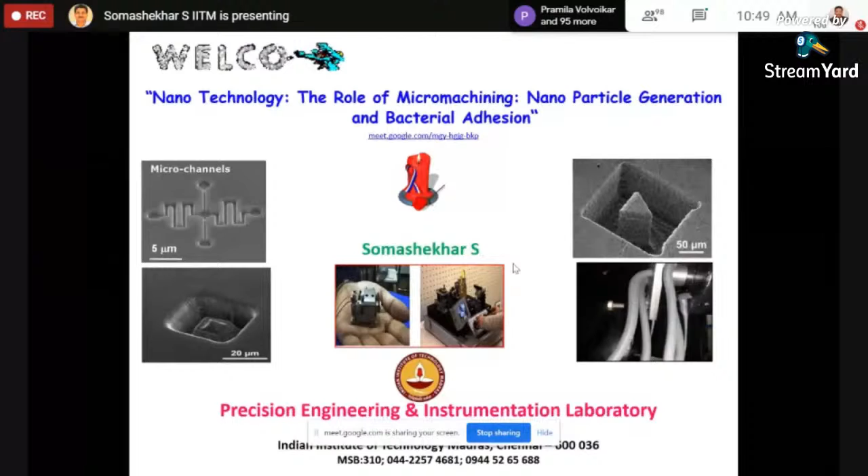On the micromachining laboratory, research work and challenges. Then we'll move on to the role of miniaturization of product and process, why it is very important. Then we'll go to the micromachining techniques, quickly the silicon-based and machine tool-based micromachining technique, because this micromachining is basically developed for MEMS devices from the electronics industries. Now we are using the same technique in the machine tool industry to do the same work beyond the scope of silicon-based micromachining.

MicroEDM - we'll concentrate more on nanoparticle generation and characterization of nanoparticles, basically copper, aluminum and silver nanoparticles. One more thing I will emphasize today is the hybrid process, which I call electrochemical discharge machining, also used to generate various features and nanoparticles of non-conducting engineering material. I will show you all these things quickly.

Then we'll move on to nano finishing for bioimplants and bacterial adhesion study.

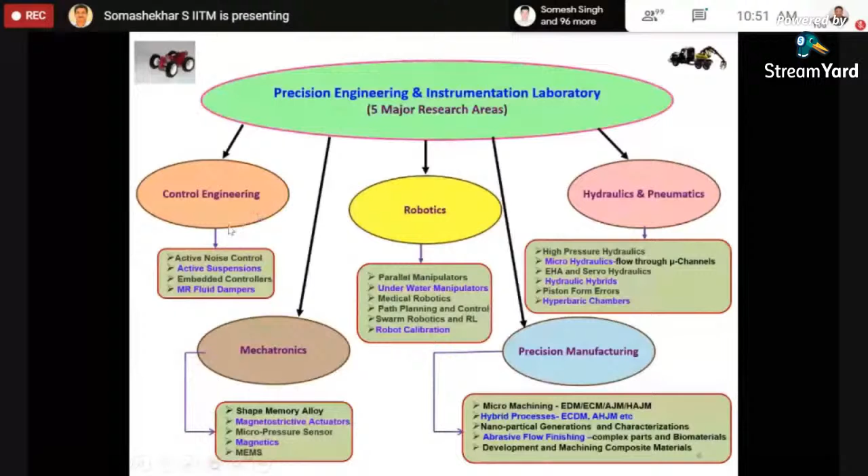This is our laboratory - what you are seeing now is the Precision Engineering Instrumentation Laboratory, one among the many laboratories in the Department of Mechanical Engineering. We are concentrating mainly on five major research areas: control engineering, mechatronics, robotics, precision manufacturing, hydraulics and pneumatics. Whatever list I've given is only a limited representation - in all these areas we are working across many domains.

All our research scholars are using these setups on the tabletop to carry out experimentation. Simultaneously, they acquire the data and do all the analysis on the same table. This is one of the beauties of our laboratory.

One more important facility we have is a robot calibration test facility - that is a FARO laser tracker. What you are seeing is a FARO laser tracker; the cost of this machine is covered under a DST sponsored project. It is used for workspace calibration, and we detect dynamic characteristics and errors in the robotic system using this FARO laser tracker.

The laser tracker emits laser light which traces the retroreflector. What you are seeing here is a retroreflector. There are various sizes of retroreflectors, which will always trace it. You will get the coordinates in the data acquisition system, a dynamical software, which will give you X, Y, Z, theta X, theta Y, theta Z.

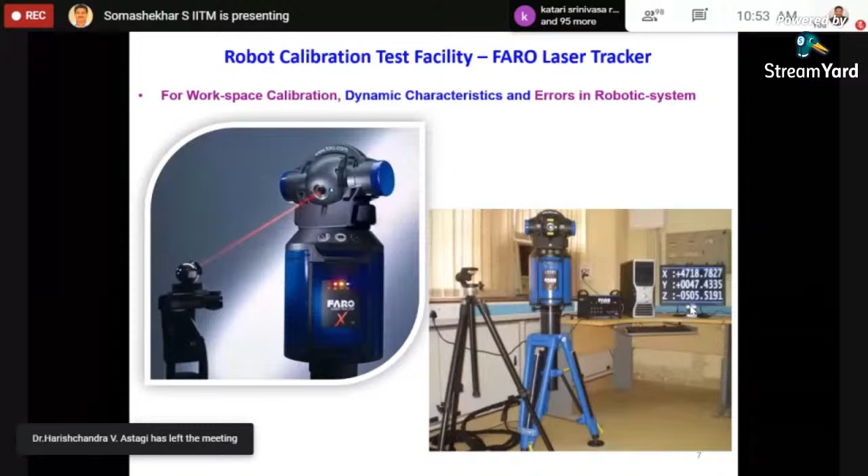What we are seeing here is the EPUC robot, which is programmable and connected through Wi-Fi as well as Bluetooth. This is used to generate particular shapes like a circular trajectory or rectangular trajectory.

What are the problems we face when it traces rectangular type objects? How to overcome this? We are doing so many simulation experiments. You'll see here we are overcoming the cornering using the same EPUC robot by locating the center of gravity of the tracing point.

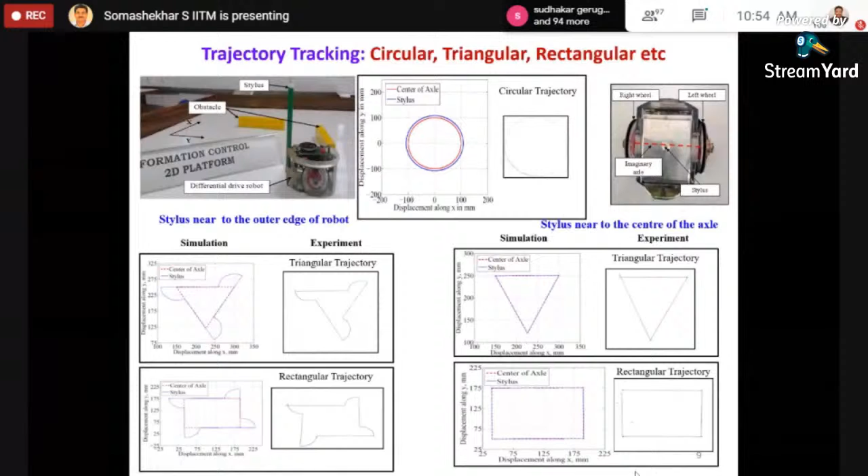Also, we are developing a graphical user interface which connects to many robots. What you are seeing here are obstacle avoidance robots, or cooperative robots for path tracking, connected through Bluetooth, which will trace any path given in the user-defined graphical user interface.

You will get algorithms we are developing for this, for example path planning and trajectory tracking, dynamic obstacle avoidance, reinforcement learning. Many algorithms we are developing in the robotic area along with our scholars. These are some papers where you will get a lot of information on how these multi-robots are used in obstacle avoidance, path planning, and waypoint navigation.

This is what I am showing you here, waypoint navigation. This is a newer area, as waypoints are the guiding control points in which you only define the initial position and final position, and place N number of obstacles.

What it will do is use the probabilistic roadmap, which generates various points, all waypoints, in which our robot will trace the optimal path to reach the destination, avoiding all the obstacles. Again, you will find some papers our research scholars have published in these areas.

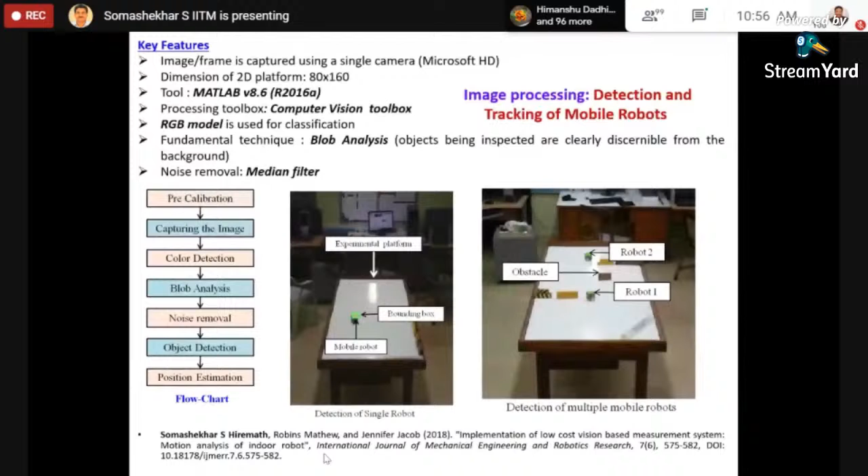Then another area is image processing, which we use for detecting and tracking mobile robots. This was an MTech scholar's work on object detection and avoiding obstacles through image processing. She used some blob analysis. Again, you will get a lot of information in this paper.

Now again, our MTech students are doing very good work. Previously you saw it would only avoid obstacles. Now, as you see in this figure, the simulation work he did will circumnavigate the obstacle, get a clear size and shape of the obstacle encountered, then go to the destination.

The Bug algorithm is a well-established algorithm to circumnavigate obstacles. Now we are using the same principle in multi-robot systems, where two or three robots come near to the obstacle.

As soon as two robots detect the object, one will circumnavigate clockwise and another anti-clockwise. Every time they exchange data on which is the nearest point to the destination, this is transferred to the previous robots, who then follow without needing to circumnavigate again, taking the least path to reach the destination while avoiding obstacles.

This is also a very important breakthrough in the multi-robot system. If you use many robots, the path traveled and energy investment is much less. You will also see an important general simulation of the multi-robot system, whose whole objective is avoiding obstacles and reaching the destination with minimum points.

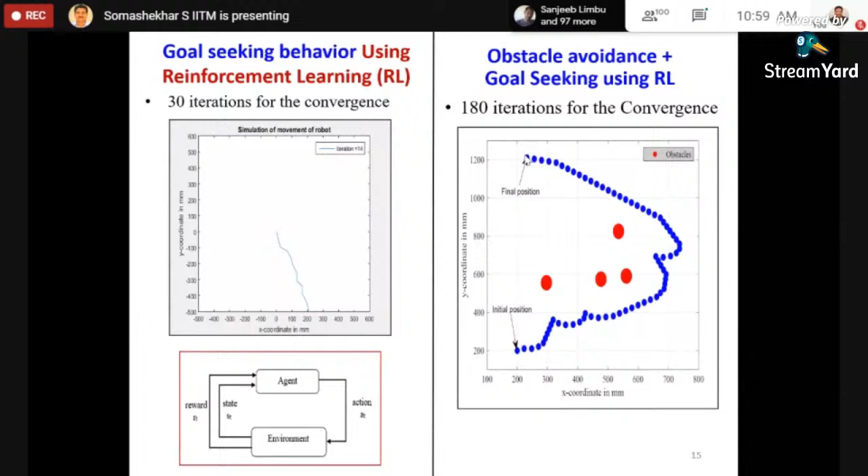This way, the robot does n number of iterations. For example, we defined the initial position, final position, and kept so many obstacles on the 2D platform. It did 180 iterations to reach the final destination. So reinforcement learning, machine learning, and deep learning play a major role in implementing various control strategies in mobile robots.

One more project, last year a student worked on an autonomous lake cleaning robot. Here we are using drones and data collection robots. The methodology includes deep learning for object detection, where the drones carry a camera and detect waste on the river using a local coordinate system, which is then transferred to a global coordinate system.

After detecting the waste, the trash collecting robots move on the lake, collect it, and return to the destination. Here also we are developing control algorithms, but these students worked only on the algorithm parts and simulated it. The experimental part is not completed because of COVID-19.

Now, one more thing we are doing is this reconfigurable autonomous sewage cleaning robot. Sewage cleaning is a big issue because people are manually cleaning the sewers, which is very difficult since it's a dark place and the atmosphere is not conducive. So we developed this sewage cleaning reconfigurable robot, which has many links and joints, and cutters are also there.

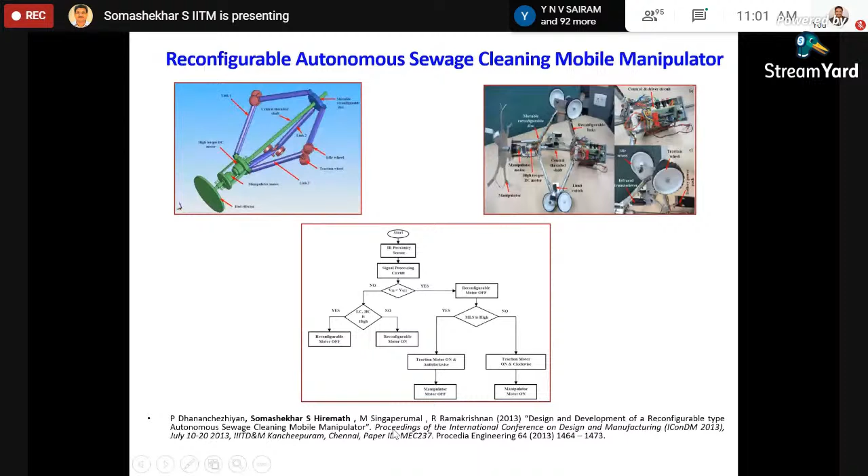Now, why did I tell you all this? Apart from micro machining, I haven't told you anything yet. Today we'll concentrate on micro machining for nanoparticle generation and finishing. The objective of showing this is that we are working in different areas.

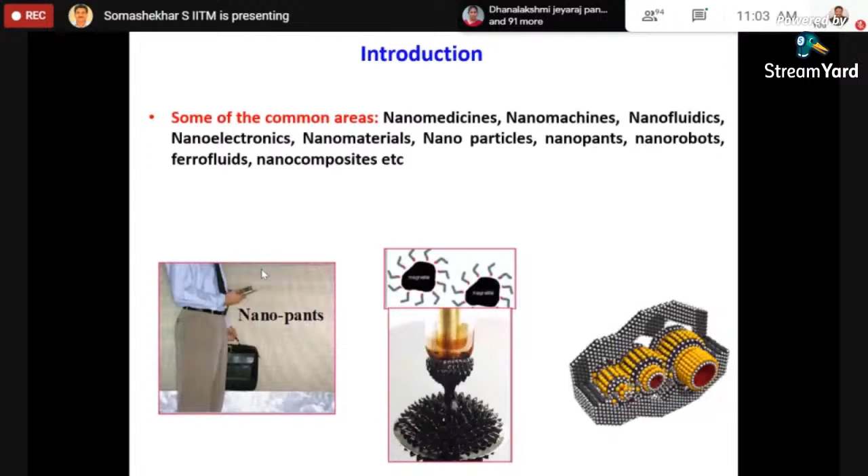Nanotechnology is very wide and difficult to define because its applications are so varied. Some common areas are nanomedicines, nanomachines, nanofluidics, nanoelectronics, nanomaterials, nanoparticles, nanorobots, ferrofluids, and many more. People are also working on nanocomposites by adding nano-sized particles into metal matrix composites or similar materials.

There is a large number of biomedical applications. I will show you in the next slide what applications exist for nanotechnology.

Also remember, funding is huge to carry out basic and applied research in nanotechnology. If you have an idea to generate any nanoparticle, particle separation, or drug delivery system, the funding is very good from the DST to carry out applied as well as basic research.

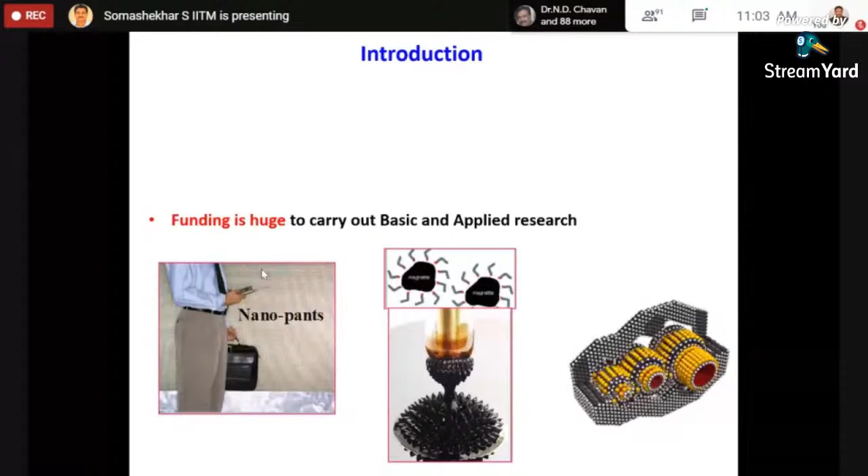Now let's see what nano means and what size it refers to. The term nanotechnology was invented by Professor Norio Taniguchi at the University of Tokyo in 1974. Remember, nanotechnology, mechatronics, MEMS, and other new technologies including robotics were mainly developed beginning in Japan, then widespread use by other countries. The original definition is the production technology to get extra high accuracy and ultra fine dimensions, that is dimensions on the order of 1 nanometer, meaning 10 to the power of -9 meter in length.

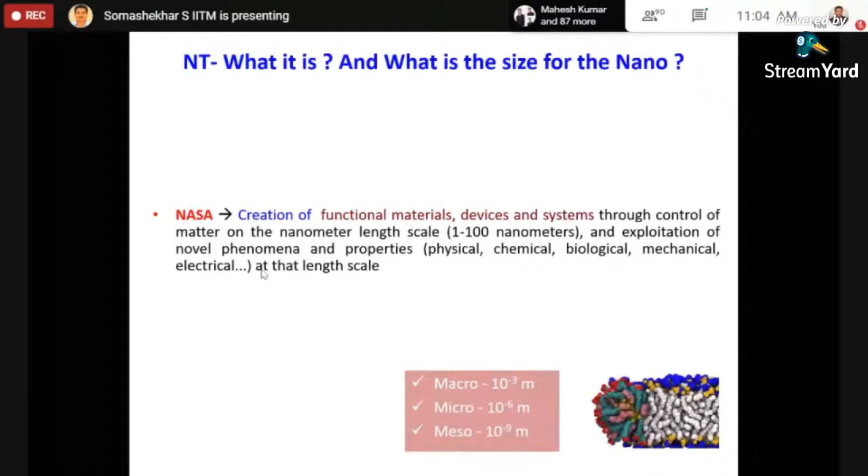NASA also defined nanotechnology in functional parts, like the creation of functional materials, devices or systems, through control of matter on the nanometer length and exploitation of nano-level phenomena and properties of the material, to use for various applications. Because of size reduction and energy saving, many advantages are there in nanomaterials.

Here the particles, as we know, are smaller than 1 billionth of a meter.

Now we'll see, friends, very quickly how nanotechnology was used in the early days. In very old days, around 400 AD, silver and gold nanoparticles were seen in a Lycurgus cup kept in a British museum, showing different colors when illuminated inside and outside.

Also, you'll see, friends, early day paintings were drawn from gold particles, what you are seeing here. Similarly, in 19th century photography, silver nanoparticles were used.

In 1857, Faraday showed how metal particles affect the color of church windows. Basically, small metallic nanoparticles are infused with the glass material. When light radiates inside in different directions, they give different colors. That was a breakthrough.

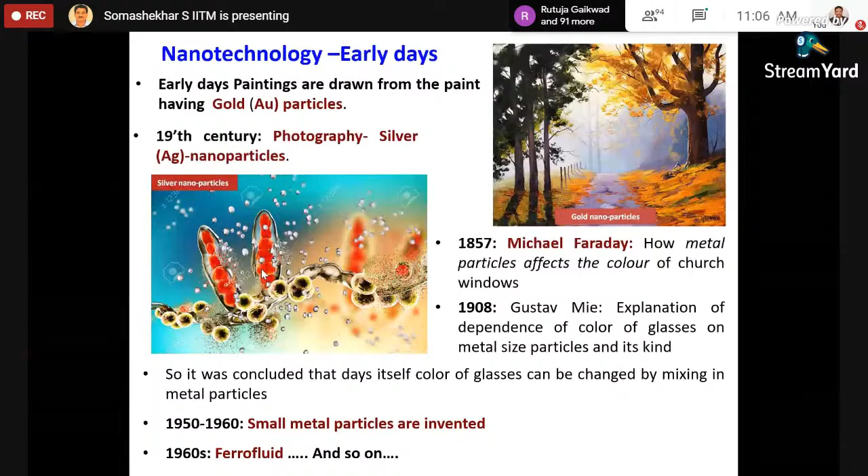From 1950 to 1960, small metallic nanoparticles in the micro and meso scale were invented. From 1960 onwards, there was a huge breakthrough in nanoparticles and ferrofluids.

Now, recently, if you apply a magnetic field or change plus or minus polarity, nanoparticles will reorient in any direction. This is again very important in drug delivery systems, and also in separation of blood pellets when you are separating them.

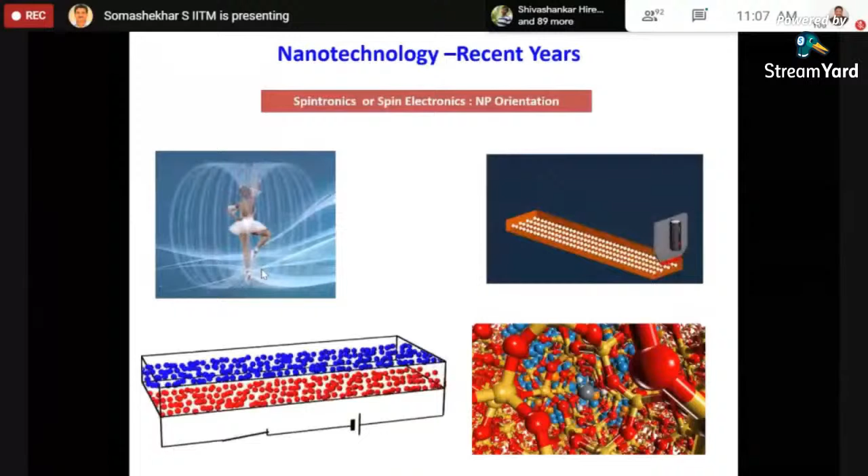So nanoparticles are the cornerstones of nanotechnology currently. Recently, as I have told you, copper, aluminum, and silver nanoparticles have gained significant interest from researchers because they have wide applications. Copper and aluminum nanoparticles are synthesized using various vapor phase reactions and liquid phase reactions.

Now our work is on the mechanical micromachining technique, because nanoparticles are generated through various processes like thermal metal removal process and ball milling method—many methods are there. Now, how the machining process is used to generate nanoparticles by controlling various parameters, we will discuss. The synthesis of nanoparticles using advanced micromachining technique is not explored much currently.

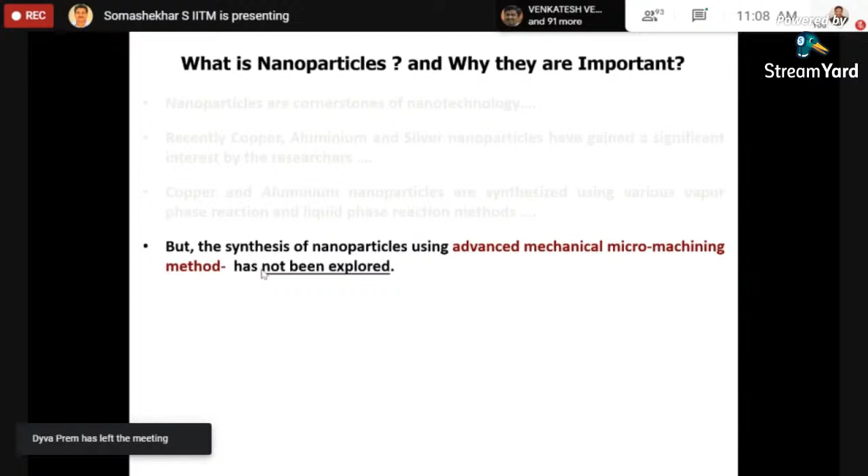The present talk reports on novel approaches to synthesize copper, aluminum, and silver nanoparticles in liquid media. Nanoparticles are synthesized by controlling various operating parameters—if you take any process, friends, not only micromachining. In micromachining, the general parameters are voltage, duty cycle, pulse-on time, and frequency. Like this, for any process, if you control these parameters, it's possible to achieve nano-sized particles.

That is the main motto of the present talk. Whether you use abrasive jet machining or laser machining, if you control the process parameters closely, it's possible to generate nanoparticles of any metals and non-metals.

Also, one more problem we face in nanoparticle generation is agglomeration and sedimentation of the nanoparticles. This is one of the great challenges for researchers—how to overcome this agglomeration and sedimentation for a longer duration. If you keep the nanoparticle solution constant, since the weight is more than the density of water, they will settle down.

To overcome this, what methods are available during the application of these nanoparticles is also a great challenge. During the process too, particles will settle by themselves due to weight. At that time, if you analyze the solutions under transmission electron microscopy or HRSEM, they will show agglomerated particles of bigger size.

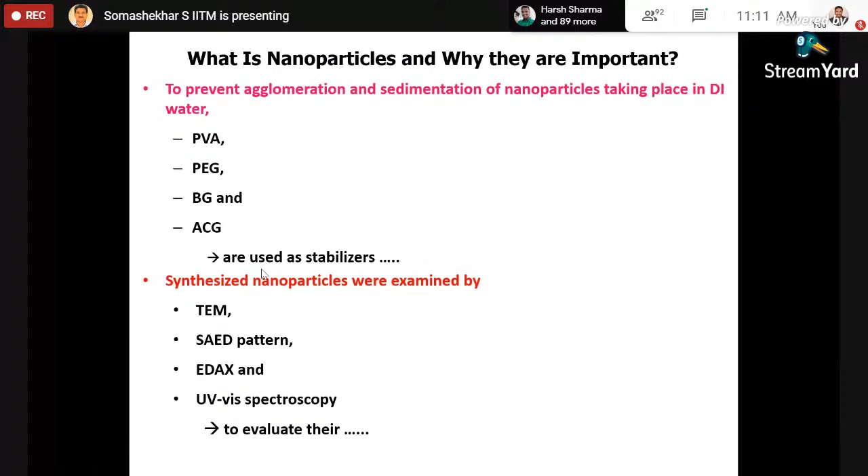Next, some of the particles we have generated in our laboratory, before going to the setup. The mean size of the copper aluminum nanoparticles was found to be 6 to 10 nanometers with a narrow size distribution and stable dispersion in the solution. Here, basically, we are using the user-friendly fluid, DI water.

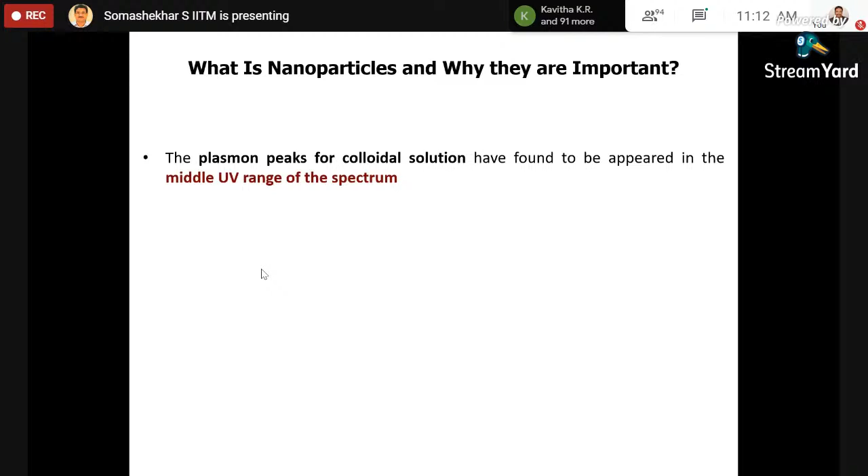The plasmon peaks for the colloidal solutions were found to appear in the middle of the UV range of the spectrum. Thermal conductivity and viscosity analysis were carried out on the generated nanoparticles to suit applications requiring heat dissipation characteristics or to overcome friction between two parts.

The thermal conductivity and viscosity of the synthesized nanoparticles were found to enhance with respect to pure DI water. As I told you, we started the particle generation of copper and aluminum with DI water. Here we use some surfactant to overcome agglomeration, but we compare the results we get, whether it's application or size, shape, whatever it may be, to the base fluid, DI water.

We carried out rigorous experiments on this. When you do the analysis of DI water alone, you get a mean particle size of 800 to 1000. When you add the surfactant, as I told you in the previous slide, it will avoid agglomeration. Also, you use sonication during the process.

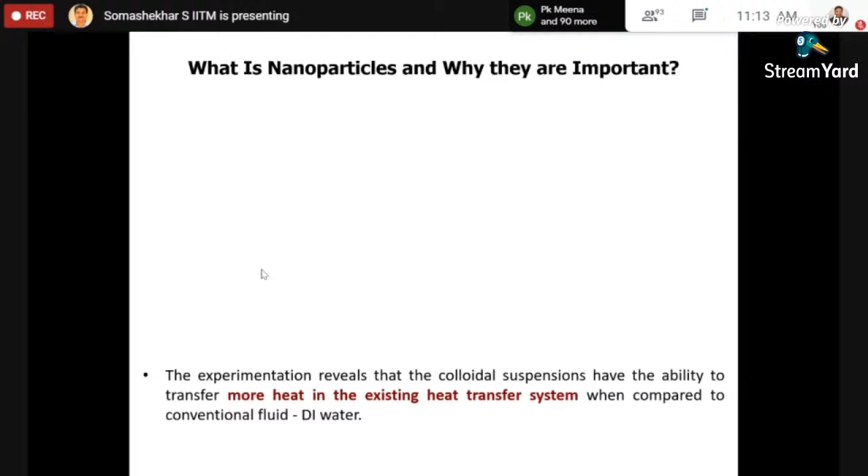The application suitability of synthesized nanoparticles for heat transfer application is studied by developing the setup in our laboratory. The experimentation reveals that the colloidal suspensions have the ability to transfer more heat in the existing heat transfer system when compared to the conventional fluid, DI water.

Then you will see, friends, in nanotechnology, along with the science, there are calls for various application areas. You should not think always of nanoparticles and nanomaterials - nanoprocessing and characterization, and nano products also, people are using this.

Before going to see how nanoparticles are generated using our micro-EDM setup, as I told you, now industries are moving towards smart manufacturing. People are thinking about miniaturization of products because it gives a lot of advantages. Miniaturization is a need of ours because it provides a lot of functional benefits, like miniature products being very simple and occupying less space.

If it occupies less space, then there's low power consumption, more flexibility, and savings in material, and much more. So miniaturization increases overall system efficiency, in one word. But at the same time it poses difficulty in transportation and handling of miniature products. This is a great challenge.

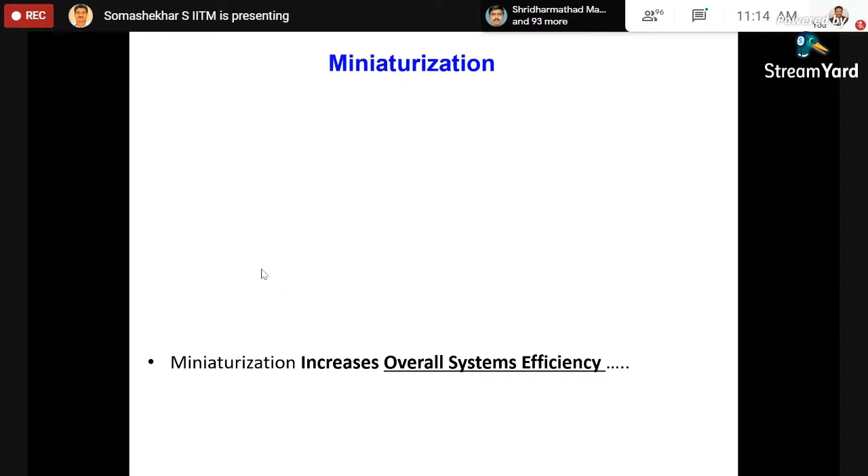Now people are struggling with how to handle and how to transport small miniature products. This is a big area where the scope of research work is still pending.

Then you may ask me, why this sudden development in miniaturization? Because customers' requirements are stringent, friends, more stringent, because they want extraordinary properties - high strength, high hardness, high fatigue strength, whatever nanomaterials or nanoparticles you generate. The customer requirements are very huge. Their demands are very high.

Then they want multifunctional properties - one material should serve all the functions they want. Also, whatever material you develop, as I told you, nanocomposites or nano MMC materials, they must be easily machinable or moldable to the required size and shape. Again, you will see all these properties are contradicting the development of the nanomaterial or nanoparticles.

Miniature features. When you develop a nanostructure, miniature feature generation is the biggest challenge.

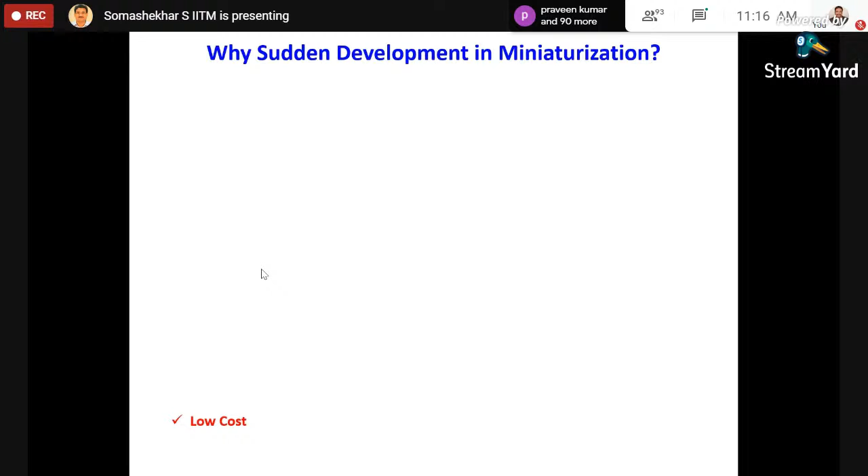After all, nano level finish on complex geometries, because many free-form surfaces are there if you see the aerospace parts. It is embedded with various simple and easy operations like smart products, complex 3D geometries. Then finally the customer wants low cost, you will produce all okay, but later he wants the cost of the product to be very low. Then what to do now? This is a big challenge for us.

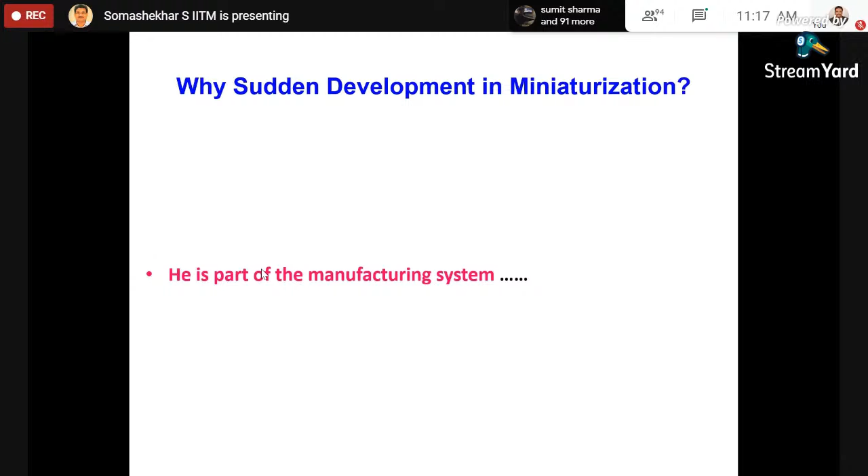Now competition exists worldwide to meet the customer requirements specified earlier. Fabrication of the component with all customer required features is very difficult, correct? Because now the customer is a part of the manufacturing system, meaning he knows every step of how his product is manufactured, what material is used, what process is used. Everything he knows now in smart manufacturing. Previously he would give the order, the manufacturer would develop it and send it to him, and he had to accept it. Now it is no way like that, because the customer will redefine things if he is not satisfied during the process itself, because he is a part of the manufacturing system.

So what to do now, friends? So many things are there. In miniaturization of any product and process, even though it is a need of the time, we have to do many things. As academicians, we have to concentrate more and more on R&D issues.

Currently we have seen tremendous changes in the factory layout. As I have told you, advanced machine tools are available now, even to handle more than 100 tools at a time. What is very important is synchronization of the various devices, because in smart manufacturing everything is connected through the internet. Previously it was inside the factory, now it is connected to the globe through what we call cloud computing.

Search for new strategy development in energy saving, harvesting, and development of newer materials and reduction in waste is also a main theme. Search for diverse strategies and methodology for optimization of process parameters.

Now, to solve this miniaturization of product and process, what we call micro machining or microfabrication or micro manufacturing technologies are there to do some of the things the customer wants now. We have to use these technologies to create the features, or whatever the products are.

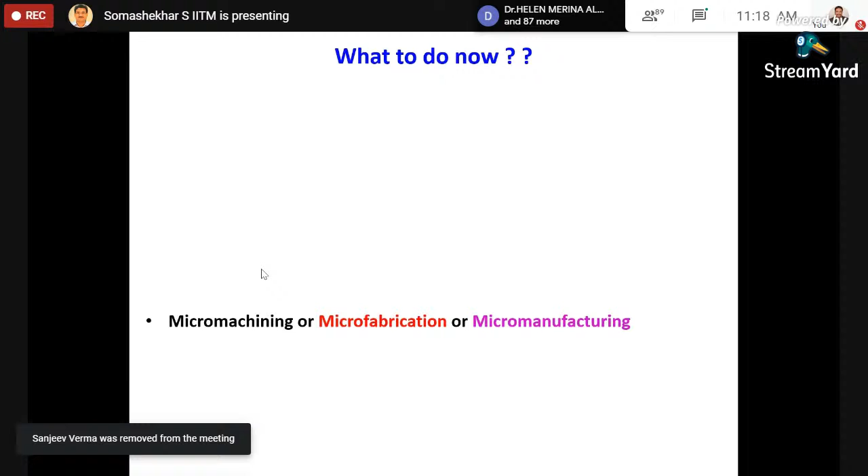Now if you see this micro machining technique, friends, previously it was developed in the microelectronic industries where the chip size is very small, in which you have to implement millions, billions of components integrated into the small silicon chip. You are seeing the processor development also, the size of the chip is very small. When the 4-bit processor was introduced, it had 2,300 transistors. Now you get the same size, but how many components are there, transistors, in terms of billions. Also the clock speed has increased drastically. How is it possible? Only through development in this micro machining technique.

Previously they used silicon as a substrate, that's why it is called silicon based micro machining technique, and also MEMS based micro machining technique, where silicon is a must. When it was introduced, they used bulk micro machining technique, what we call the subtractive process, meaning they remove material layer by layer to get the final product. Now the technology is advanced, now they are removing atom by atom, friends, to get the required products.

If you see surface micro machining, on the other hand, what we call newer technology, even though it is very old, in mechanical micro machining 3D printing is playing a major role. This is the additive process. Any complicated part is able to be generated using the additive manufacturing process, by putting layer by layer. Like surface micro machining, it adds material layer by layer to get the final product, now it is atom by atom they are adding. Why are they doing this? Control over material deposition or material extraction gives close control over size, shape, everything is possible.

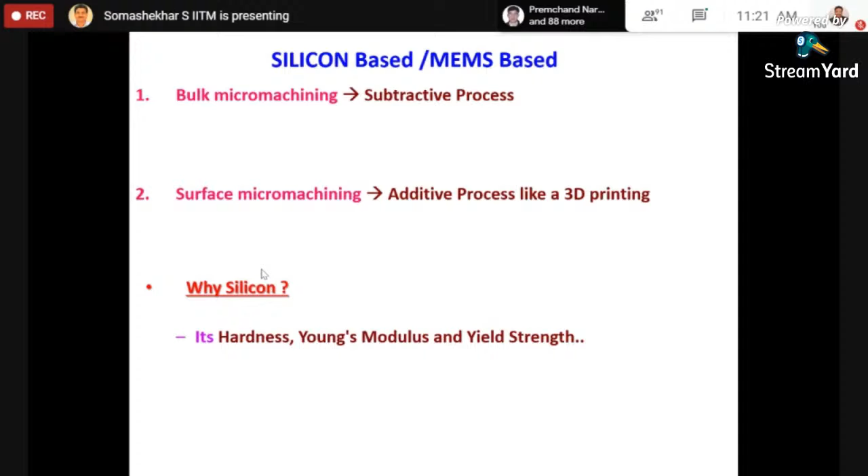You may ask, why silicon, sir? Previously, now people are using so many metals. If you see why silicon, its hardness, Young's modulus and yield strength are higher than steel. Also it is lighter than aluminum and harder than steel. Also, friends, during that time, for miniaturization of product, very small products were very easy to etch or add using silicon. That was the only possibility at that time.

Now the current tendency is that as mechanical engineers, we have to focus on the machine tool based approach. If you see the machine tool based approach, we are also able to currently succeed in producing micro parts using the same technology, like a material removal process, what we call subtractive process or bulk micromachining.

Then there is the second one, the material additive process. Similarly, surface micromachining, where we are adding material layer by layer or atom by atom to get the products. Here, what we are using is the machine tool as a base, keeping different methods, but still using the machine tool as a base.

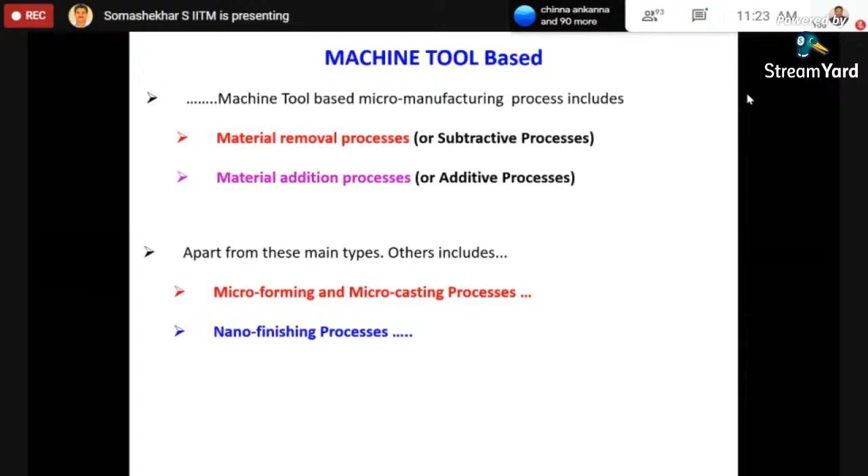Then another category is nano finishing. What is this? This also comes under micromachining. Here the objective is surface finish, to get a mirror finish by removing material layer by layer or atom by atom. How closely you are controlling, the objective is surface finish, not micro features.

But these traditional processes have some drawbacks because physical contact is required, and well-defined cutting edges are required. The most difficult task is the fabrication of these micro tools. Also, when these micro tools come into physical contact, what happens? They break. Chances of breakage are more.

Here material removal is in terms of microns. Please remember, friends, here the objective is not the size and shape of the object. Micromachining is particularly meant for the size of the chip. If the size of the chip is less than 1 mm, it is called micromachining.

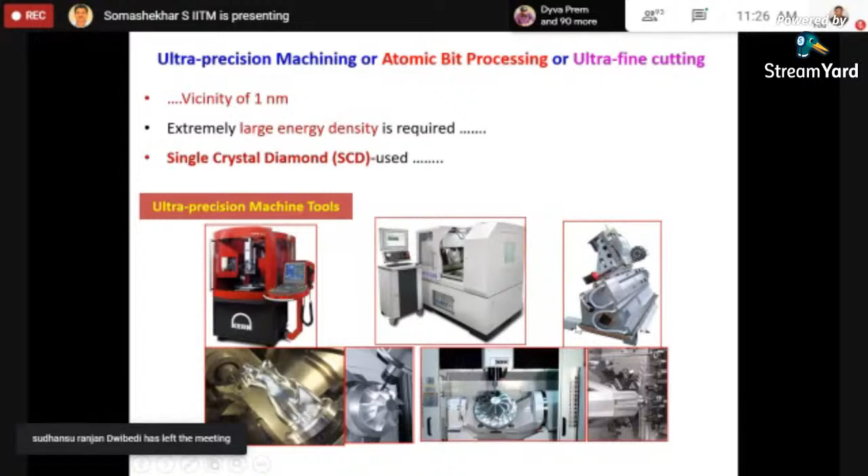Quickly, you'll see here, that's why we call it advanced micro machining technique. What are these advanced micro machining techniques? We are using here some form of energy, whether mechanical energy, chemical energy, or thermal energy, to remove the material.

Again, it is very important that the size of the chip is less than 1 mm. Only then is it possible to generate features of required size to the required dimensions. This means, friends, even though this machining process will take a lot of time compared to conventional machining, close control on precision is ensured.

Then you will see, friends, now people are developing hybrid processes by combining the advantages of two processes and overcoming the disadvantages of the other two processes, resulting in hybrid micro or nano finishing processes like electrochemical discharge micromachining, electro discharge micro grinding. Many such processes club two or three techniques together to take the advantages of multiple processes and remove the limitations available in the other processes.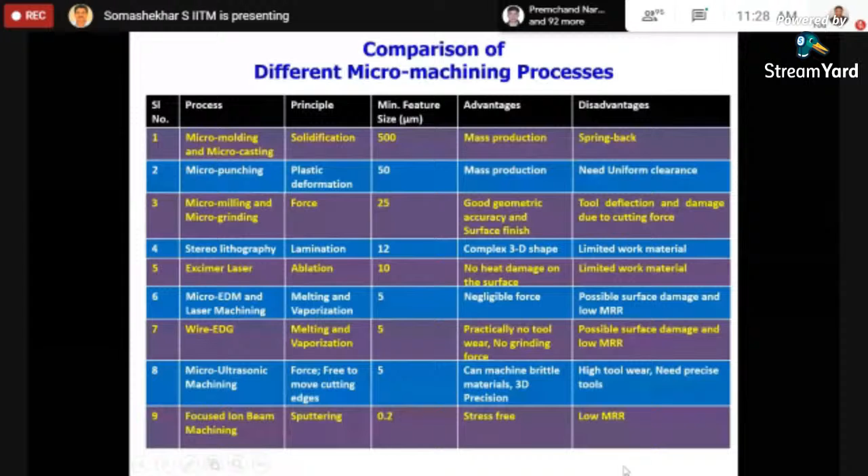Rajesh? Sir, this is Chandrasekhar, sir. Yes, sir, Chandrasekhar. I'm thinking we are connected through Wi-Fi, we are online, correct sir? Correct, we are online, yes sir. Thank you. In between, professor, I'll call you, you tell me yes, okay, only one. After half an hour I will call you. Okay yes sir, we are following sir. Thank you sir, thank you.

Now let us see, friends, some of the micro machining facilities developed in our laboratory. These setups are developed by our research scholars. It's not like lakhs or crores, maximum it would be thousands, apart from the other devices like power supply and oscilloscope, all these things.

Let us see now how to develop the EDM cell. I hope, assuming all are mechanical engineers, we know this EDM cell basically consists of the workpiece, tool, feeding mechanism, and operating parameters. Using this, the basic mechanism of material removal in EDM is the melting and evaporation of the workpiece material. The advantage here is the tool and workpiece are always maintained at a certain gap, what I call gap breakdown.

Now I will show you some of the animations to you people, okay, very quickly.

Chandrasekhar sir, you are seeing this setup? Yes sir, yes sir. Now I will check whether it is okay, you will see now. Sir, you can open, sir. We can able to see, sir. Yes, just now see, sir. Yes sir, thank you. The objective, see, now it is seeing, sir. Professor, seeing? Yes sir, yes sir. Perfect, sir, perfect.

Now you'll see the whole process is controlled. This is a copper plate she is machining now using the PZT actuated tool feed mechanism. Other things are the accessories itself.

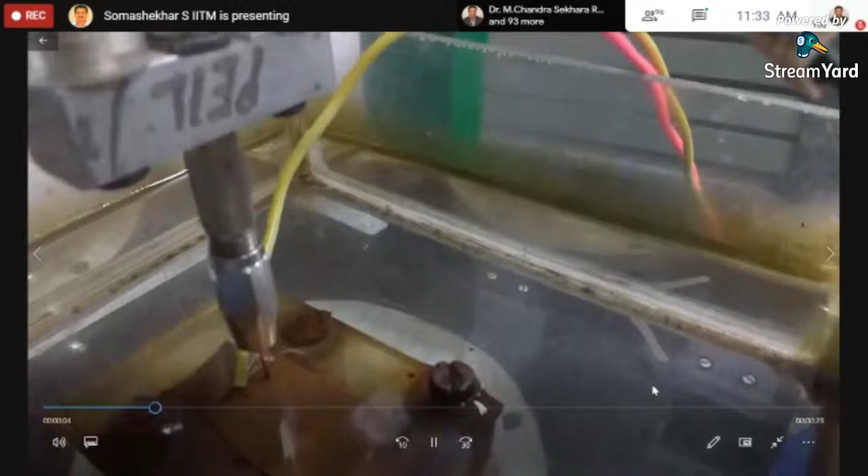Replay, beta, okay, one second. This is, she is increasing the voltage to visualize how the material is removed. The same - you see, friends, here it is the PZT actuating tool feed mechanism.

To enhance the machining operation, we implemented what I call recirculation systems. Let's move on to this very quickly, friends.

Now you see some machined holes. I'm showing you the machined holes on the silver plate. These are some images carried out for different parameters. If I vary the voltage, frequency, and T on, meaning indirectly the duty cycle, what happens to the size, shape, and recast layer? Many things are studied in the process.

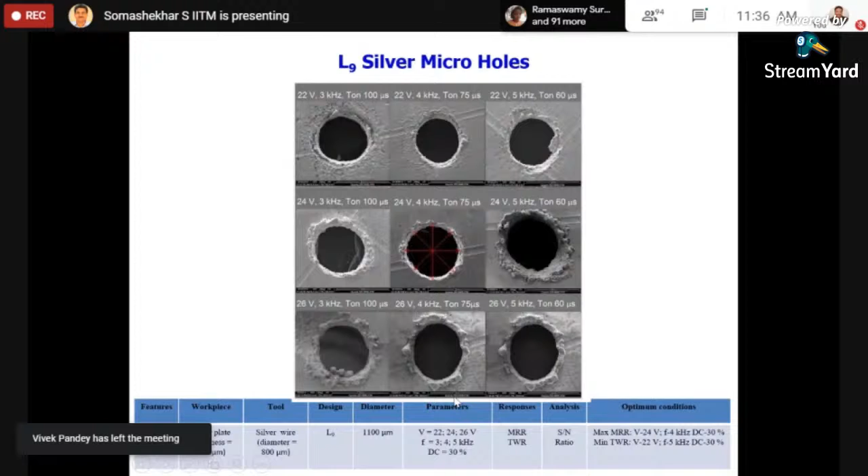Similarly, you will see copper machined holes using the EDM process. To overcome tool wear, the tools are coated with Ni-P coating, nickel phosphorus coated tools, used to machine various holes. She carried out 16 experiments with varying process parameters, concentrating more on tool wear and how it is affected.

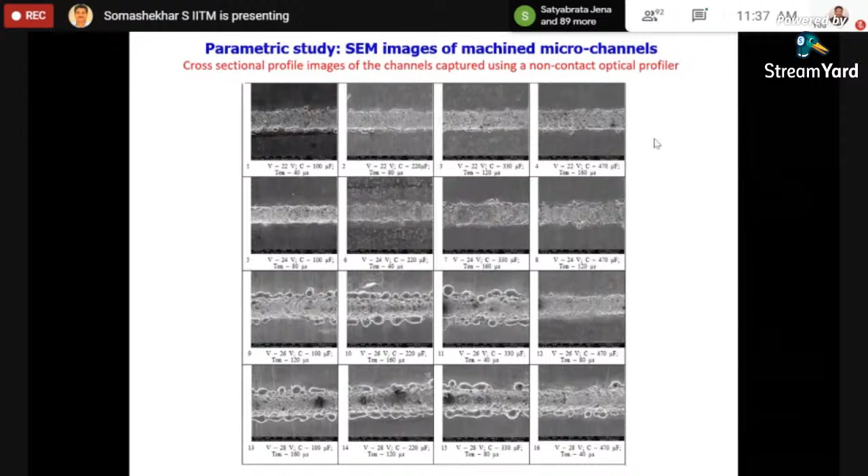Now here, these images show the effect of process parameters on machining channels, straight channels. Depth is also captured using the optical profiler, which is a non-contact mechanism. They measure the width of the channel and the depth of the channel along with the Ra value. These are some of the channels machined on the conducting material.

For this we have developed one setup, which I'll show you in the next slide. The whole preamble of this talk is that bacterial adhesion on implant surfaces is one of the major concerns, and it leads to biofilm formation, infection, and failure of implants. Please note, friends, the surface properties of the implant - surface finish, surface topography, surface energy, chemistry - play a major role.

Many literatures reveal that irregularities present on the implant surface, that is a rough surface, exhibit a greater surface area with depressions, providing more favorable sites for bacterial colonization and biofilm formation. These roughness parameters make a very good place for bacteria to grow in a logarithmic scale.

As I showed in the first slide, I'll go quickly over these areas where rough surfaces are present, spots, cracks, channels, small micro channels I am talking about - bacteria easily grow there. Studies also show that ultra smooth surfaces did not favor bacterial colonization and biofilm formation.

Now, how to enhance this? There are several surface finishing techniques available to alter surface properties. As I told you, implants exhibit freeform surfaces which are difficult to finish with available conventional methods - no other way now. We have to go for some other method to machine these freeform surfaces.

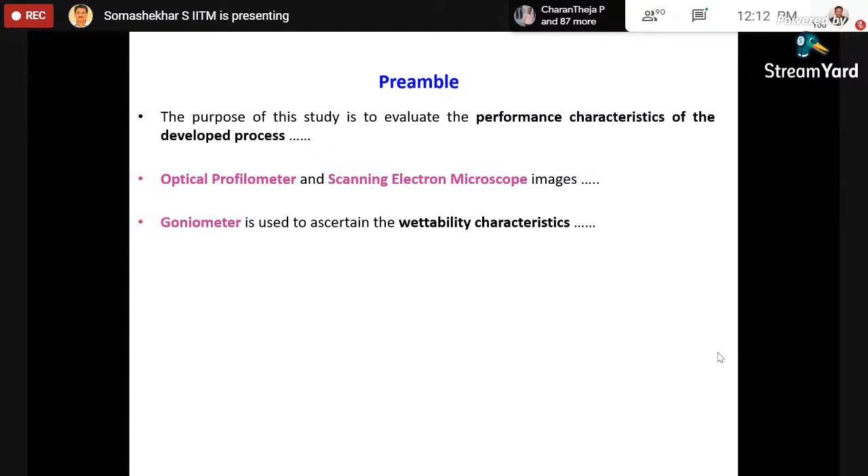Further, the machined surfaces are subjected to the bacterial adhesion study, in which E. coli bacteria and S. aureus bacteria are grown on these machined surfaces.

In conclusion, the obtained results demonstrate, and I'll show you the results now, that the developed UAFF, meaning unidirectional abrasive flow finishing process, is the need of the hour to alter the surface characteristics of bioimplants, which generally have freeform surfaces, and to reduce implant-related infections and early implant failures.

We already know that the significance of surface finish is enhancing not only the aesthetic aspect but also the functionality of the process. This can be done in the conversion process.

We already know that in this conversion process, getting the part is done using material conversion. Then finishing is very important, it is an added advantage. Also remember, friends, it will add cost to the manufacturing process.

This is a major part. Converting raw material into final product is very easy in the conversion process. But after adding this functionality, property, or aesthetic aspect, people are spending a lot of money on finishing.

The characteristics of finished products involve various things. Here I am showing the size, geometry, surface topography, surface integrity, and how it affects various functionality in the component, whether lubrication, vibration, power density, torque, or heat generation. All the parameters listed here depend on the surface characteristics of the machined surface.

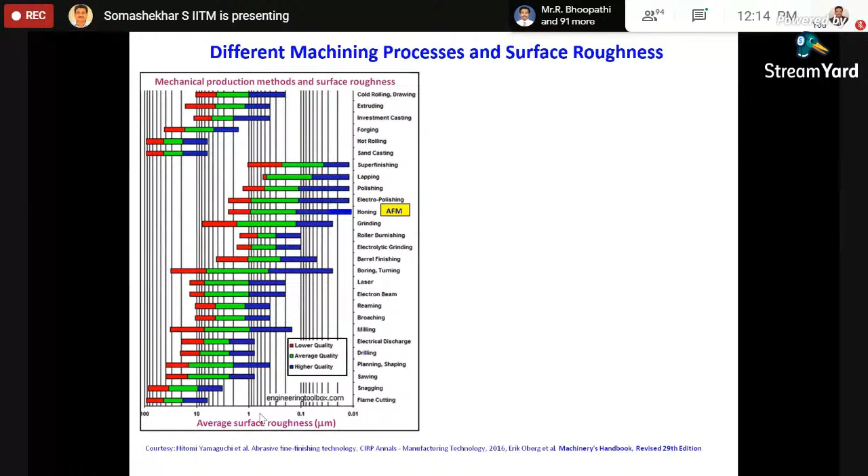How to enhance machining performance, we already know various processes exist. Here I am showing different processes starting with flame cutting to cold rolling and drawing, which show the average surface roughness for different processes. Whether it's laser machining, electron machining, reaming, or milling, they will give certain RA values. We have to use different approaches for further improvement.

Then there are various processes: hard turning, surface roughness, how it changes when we move towards lapping and polishing, passing through the super finishing process also. Grinding, what is the range of RA values. Based on the requirement, you have to use the process to get the desired surface finish.

We already know how grinding, lapping, and honing perform, and critical components are machined using various finishing processes. Now quickly, our topic is the abrasive flow finishing process.

What is this? What I am doing is using a semi-solid abrasive media, a viscoelastic polymer media. Viscoelastic is like a rubber material, which is impregnated with abrasive particles of required size, starting with bigger size and ending with smaller particle size. Then this media is used to remove flaws, or what we call peaks and valleys, in the machined surface.

Now, this process: you'll see this polymer media which I am forcing through the workpieces. In the other sketch, the abrasive media impregnated with the viscoelastic polymer is moving through multiple holes on the workpiece.

If you pass this media again and again, recirculating it through the workpieces, as the number of passes increases, the finishing improves, and at some point, after 6 or 7 passes or whatever it takes, you will get the mirror-like finish you want.

There are different methods: one-way process, two-way process, orbital process, meaning the workpiece is held here and the media is passed in one direction. It is very good because the surface texture produced is all unidirectional, giving a layer-by-layer finish on the surface.

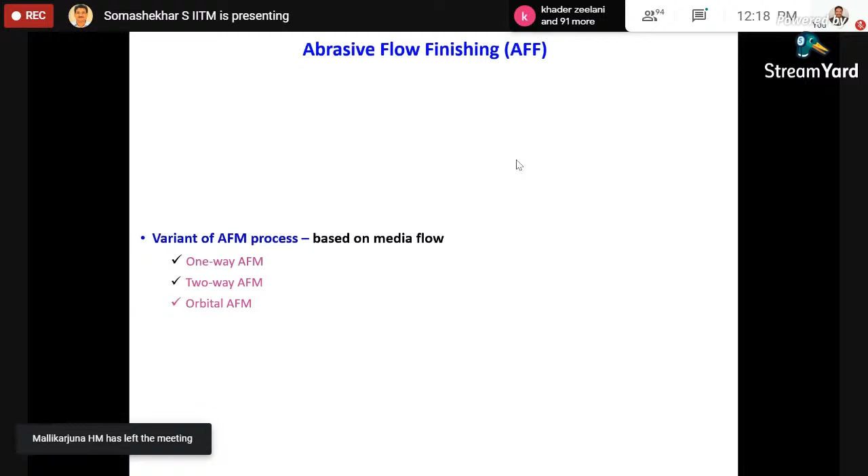There are various variants of the AFM process, as I have told you. Again, the objective is finish, and what are the process parameters here? Different types of abrasives, viscoelastic polymers of different varieties, additives and how much percentage or concentration you are adding, the metals used in machining, the geometry, and the manufacturing process will all matter. A workpiece machined with simple turning is different from CNC turning, correct? Which workpiece is the input matters.

The ultimate aim is to study the surface morphology, geometrical variation, wettability characteristics, and bacterial adhesion. These are the various process parameters here.

As I have told you, we studied the thermal property using thermogravimetric analysis and heat flow analysis, mechanical property, and rheological property like shear viscosity versus shear rate, shear stress versus shear rate, and many other properties. The rheological property, mechanical property, and thermal properties of the abrasive media itself, this is for the abrasive media.

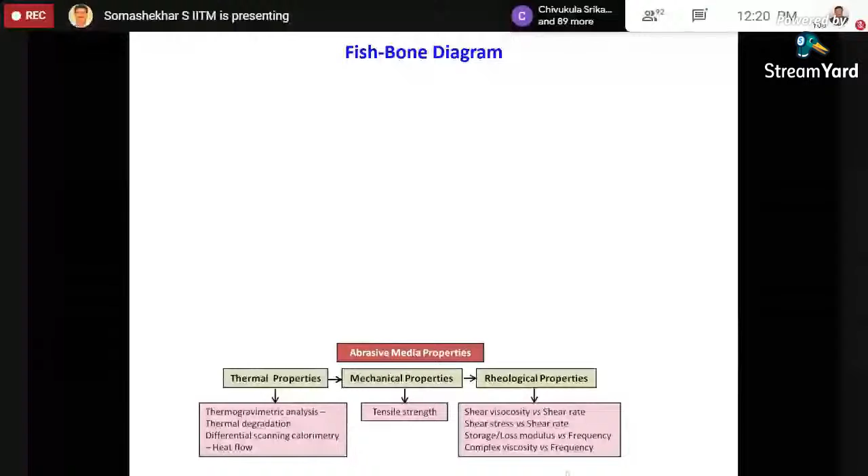As I have told you, number of parameters matters, like number of cycles. As the number of cycles increases, surface finish improves, roughness decreases. Pressure is also different, how you are extruding this media through the workpiece will matter, along with abrasive size, abrasive composition, media viscosity, and other parameters.

Similarly, we studied material removal in the other media, and various components are machined - various parts are there. They will machine using this process. This is a setup which we call the unidirectional abrasive flow finishing process.

This is the media, friends, it is like a rubber-like media. This is a power pack used to push the abrasive media contained in what we call the abrasive cylinder. There are two cylinders here. This is the abrasive cylinder in which the media is filled completely, which should be pushed through the workpiece using the hydraulic cylinder.

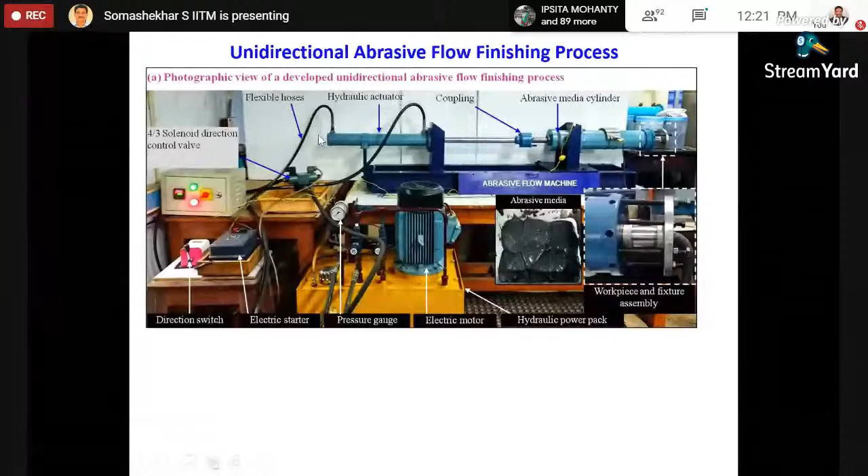I'll show you the animation, then you'll get a very clear picture of how they operate. As I have told you, as the number of cycles increases - 3 cycles, 6 cycles, 9 cycles - the peaks and valleys get reduced. However many cycles you need until you get a mirror finish, you simply recirculate this media again and again.

This is what we call the unidirectional closed loop. Unidirectional, because the media is passing in one direction only. You will see here the hydraulic cylinder and abrasive media. Abrasive cylinder connects to hydraulic cylinder. What we are doing here is the abrasive media is filled in the abrasive media cylinder, using this cylinder and pushing this media.

Then it will pass through the workpiece and fall into the next abrasive media cylinder. As soon as it completes this pushing, it will go back to the original position. Then cylinder 2 pushes the media, and here also one workpiece is kept. Again it will feed back to abrasive cylinder 1. This cycle will repeat - no need to handle it manually.

Otherwise, filling manually this viscoelastic polymer impregnated with abrasive is a very difficult part - it is a semi-solid media. You have to take a lot of time to fill it. To overcome this, this is a hydraulic circuit where the media will recirculate for however many cycles you want.

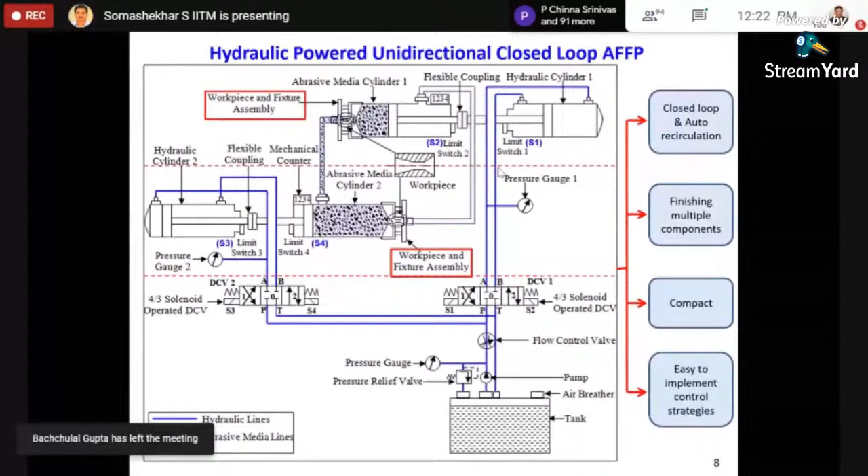You'll see here, friends, how the media goes through the different holes or cavities. The path of least resistance will be taken first to finish, and then the next resistance. Quickly I'll show you here - again, animation problem.

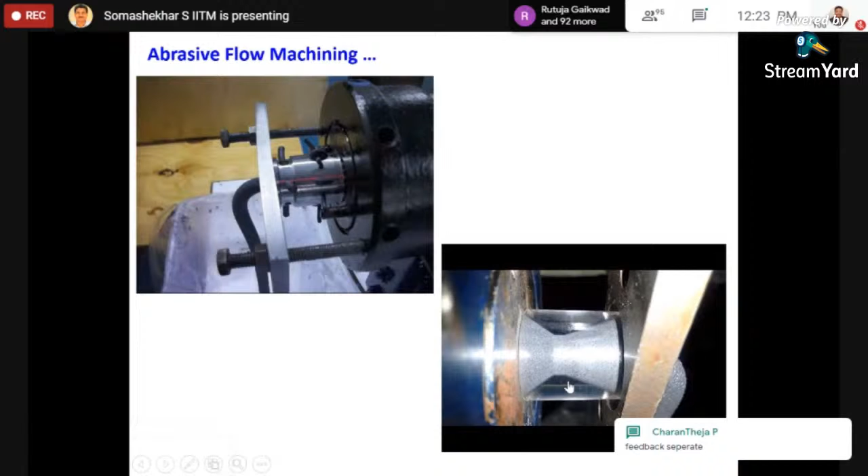See this, friends, this is the nitrile collar in which we are pushing the abrasive media. Down below you'll see this is an acrylic block in which we made a convergent-divergent nozzle to study the effect of moving fluid on the cornering at the throat section, how the material is removed - we are studying this.

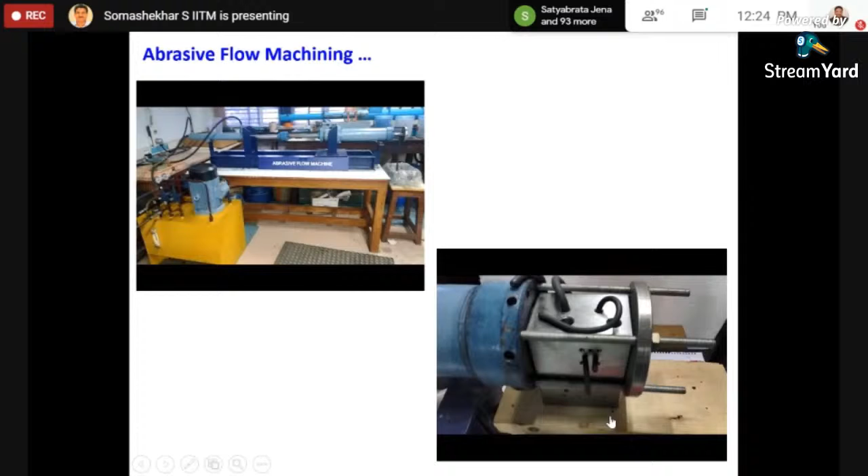These key friends here, now it is a hydraulic block which is machined using the abrasive flow finishing process. Here also you'll see when you push this, radial holes are all machined. See here now, how the media is pushing through this aerospace part, it has different holes, how it is machining you'll see.

Professor Chandrasekhar sir, are you online? Yes sir, yes sir, yes sir. Quickly, I will take another 10 minutes. No need to worry, okay sir, go ahead sir. Go ahead, because I started delayed. No, that's why I'm telling. No problem sir, no problem.

Now we see friends, we conducted many studies. First is a machinability study, where we studied different workpiece materials. You'll see the beauty of the fixture which holds the workpieces. We want to study the repeatability on the workpieces. We are holding these 4 workpieces at a time, whether same material or different material, then subject this for analysis.

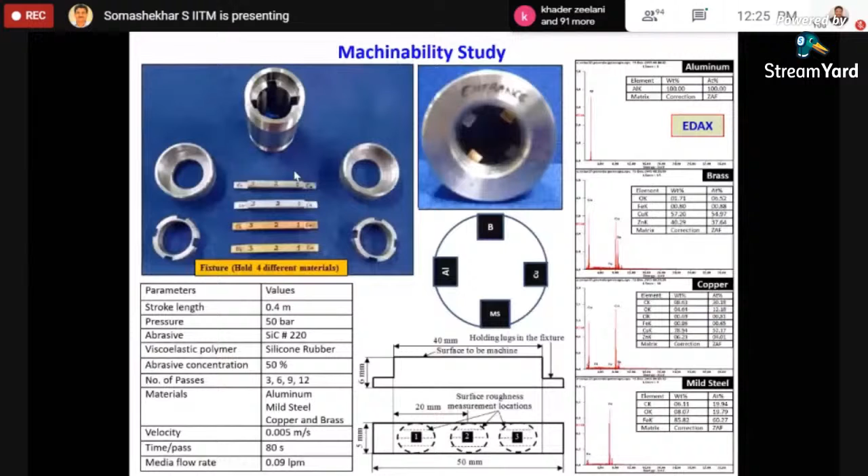Okay, now we will see, as I have told you, as the number of cycles increases, the RA value, Rmax value, all decrease. Sometimes RZ is very important, sometimes Rmax is important, and most of the time RA is taken. I'm showing you here all the process parameters of surface characteristics reducing as the number of cycles increases.

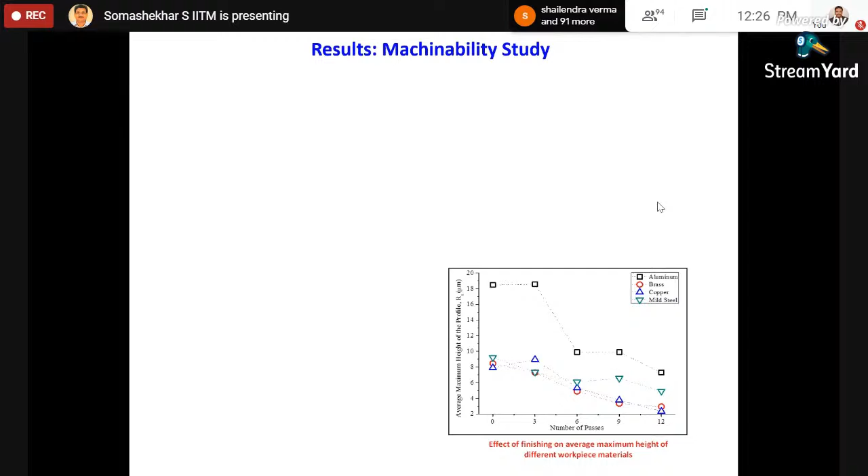These are some of the 2D profiler images, showing how each process reduces the RA value before and after machining. The workpiece material, whatever it is, aluminum, brass, copper, mild steel.

Then there is what I call the convergent divergent nozzle. The beauty here, friends, is that the machined surface we are seeing is SS316 steel, shown in this figure. To study the effect of the movement of this abrasive media on the throat section, you will quickly get the radius. This is very difficult to get in a convergent divergent nozzle or venturi meter, where sharp corners are there.

But here in this process, you will get a smooth curved surface in the throat section. You'll see the text shown here reflects the finish produced on the workpiece. Meaning, as the number of cycles increases, the RA value goes on reducing, meaning you will get very good surface finish, even nano level finish.

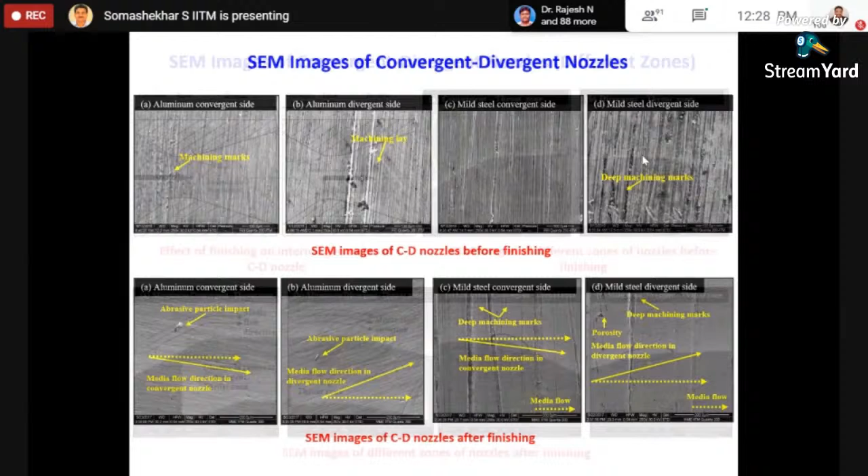And then we used SS316 and TI6AL4V for the bacterial study. This is machined, as I've told you, without using only one concentrated abrasive particle size. We use 220 to 420, 400 also. Meaning 220 or lower is coarse, and when you go for 400 and 600, it is fine and smooth.

Also we studied the hybrid approach, meaning 50% 220 and 50% 400, which gives very good results.

These show the SS316 and Ti6Al4V optical profile images for morphology studies, deep structures and how they are removed. In the beginning, deep structures are there as received. After machining, all are removed. You see, before machining, all structures are deep; after the hybrid machining, all are removed. Also, this shows a unidirectional nature.